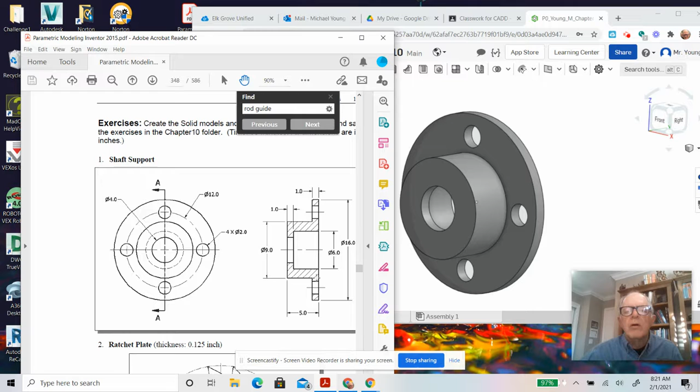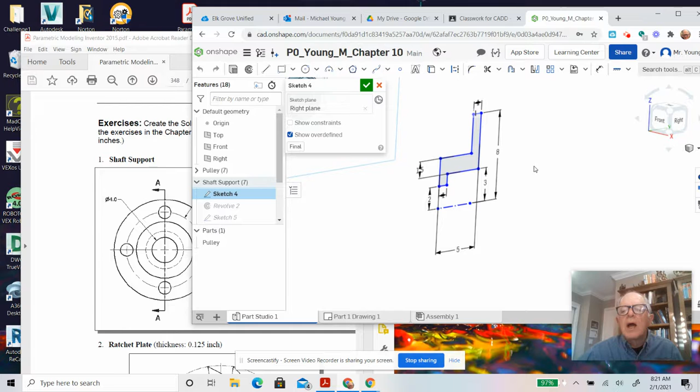We're learning how to put our parts into folders. So here's my shaft support folder, and sketch 4 is the first one. So you can see I did it in the right plane, not the wrong plane, the right plane. And I'm going to look straight at it, right click, view normal. So there's the shape.

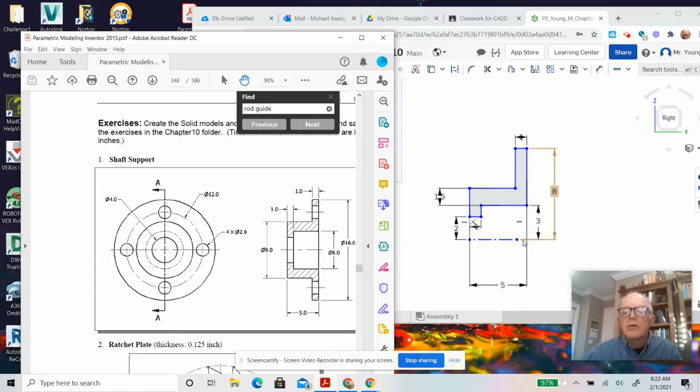I just dimension it. So this diameter was 4 for the hole, so this was 2. All these dimensions are the same. 8 and 3 is half of 16 and 6. Make this a construction line, and then do your revolve command. Then you have to, well, first I made my... let's get out of here. Escape.

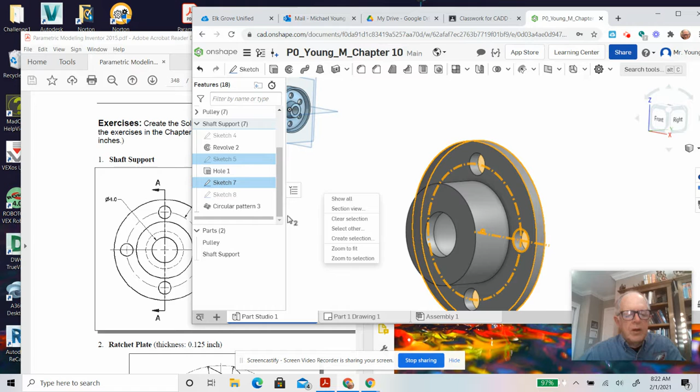Okay, so then sketch 5 was my hole. So you had to put in a, there's a name for this circle, I forget. But anyway, it's where the centers of all the circles are. And it's a construction line, so we turn it to a construction line. And then it doesn't matter whether you do the one on top or which side. You have to put one of these in.

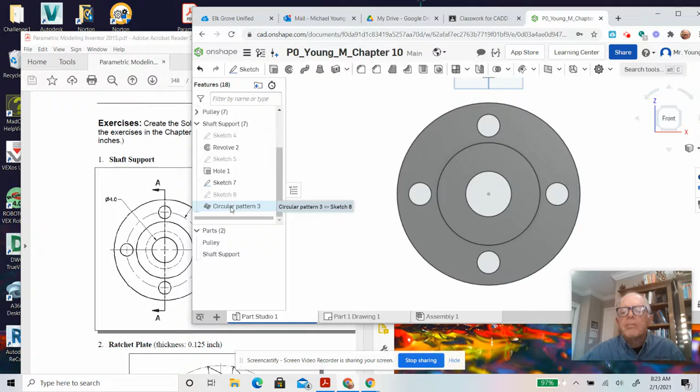So you have to draw a line out to know where it is. So again, I just drew it straight out to the right. And where it intersects, that's where you draw your circle. Or you can get out of this sketch now and use your hole tool. Do either way in this case. But you would have a point, make a circle, and then you do your circular pattern.

So I will be looking for circular pattern and revolve in your history tree in order to give you credit. And then, like I said, tomorrow we'll do this.